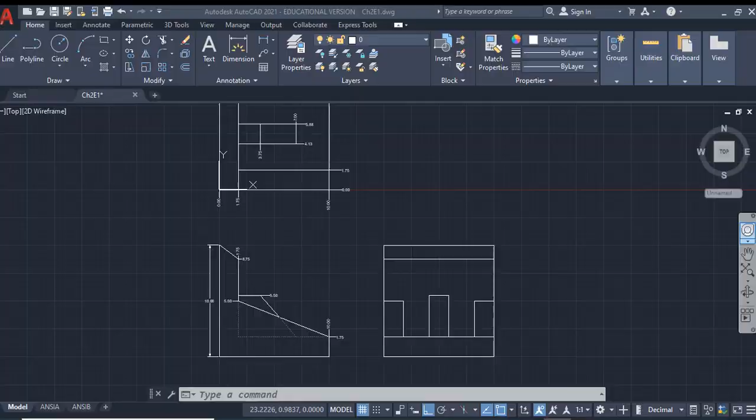For this last exercise, I'm going to pull up that Chapter 2 worksheet that we did in 2 dimensions before, and you can use any Chapter 2 worksheet you want. This has my title block set up and also the 3 views in 2D.

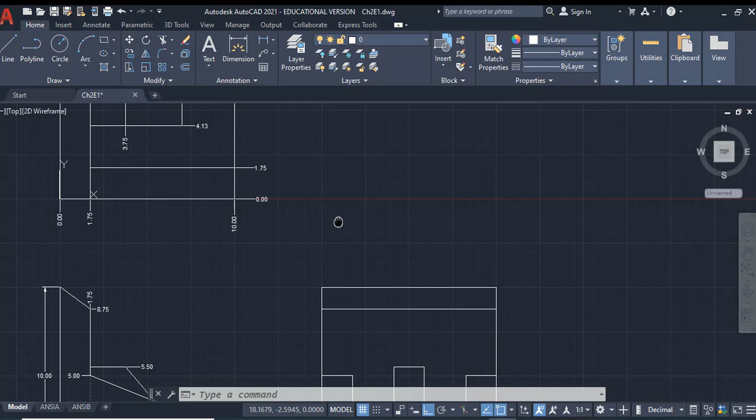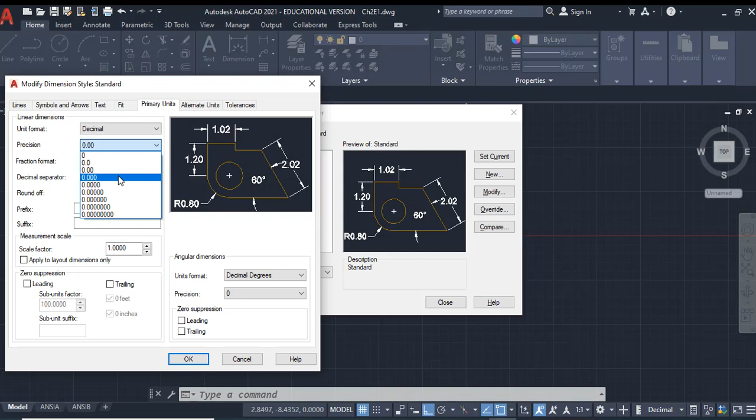I went ahead and added some coordinates over here. I moved my coordinate system over to line up with each of these blocks. If you type in dim style, this will allow you to modify the number of significant figures you're showing. It defaults to 2 significant figures, and you can also bump the text size up if you want, and here's the arrow size. I'll go ahead and set that current, and I'm going to say there's dim linear, dim angular, and I'm going to say dim ordinate.

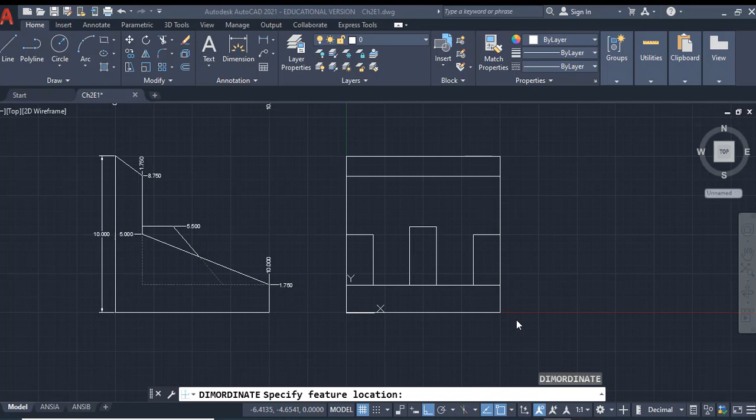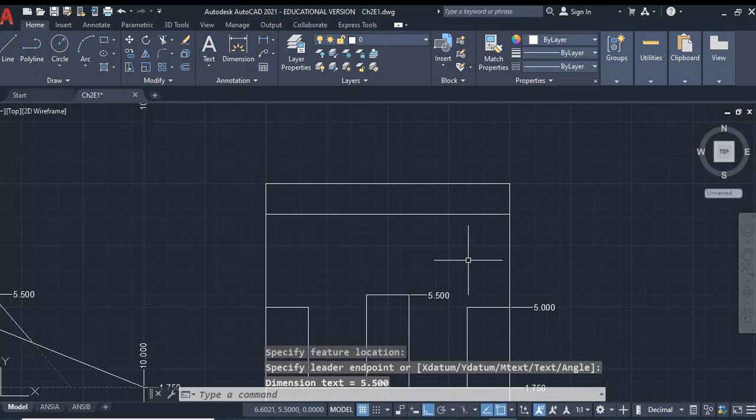With my snap settings on, I'm going to go ahead and grab some of these features. This is where you'll find out if you had everything dimensioned right, so you might be redrawing a few things if these did not get in here. Just remind yourself of the dimensions of whatever worksheet you did out of the book.

Looking at these, I think probably this top view is going to be the easiest view for me to get through. So I'm going to go ahead and open up a new drawing, making sure to grab my title block that I created before, because I'm going to use ViewBASE and pull some things into our title block here.

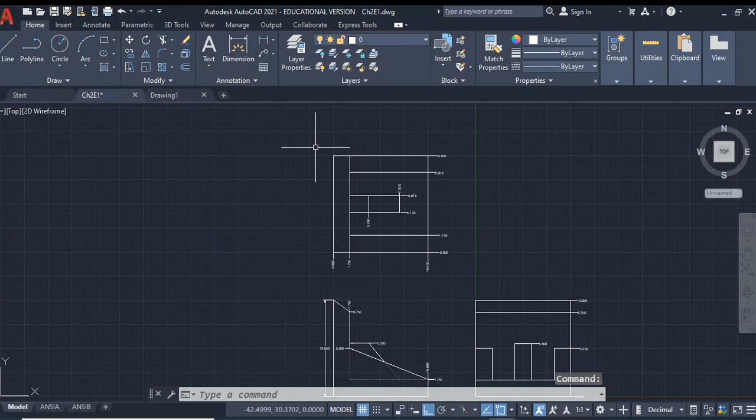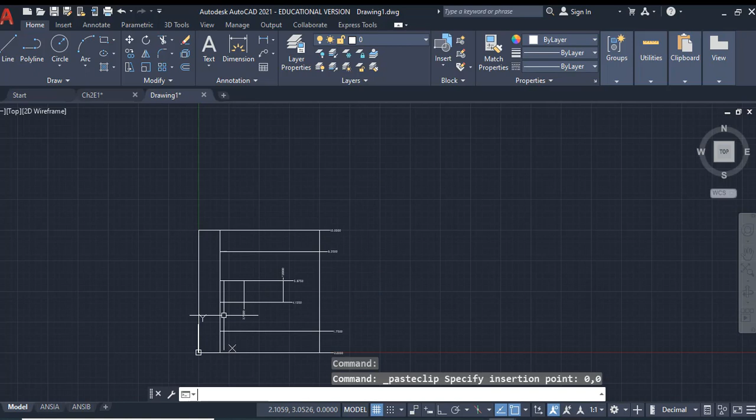I'm going to start with this top view. So I'm selecting the whole thing, right click, and copy this with a base point onto my clipboard, then pull it into drawing number 1 with just a Control V. Here I've got my base point, and I'm going to put this in 0,0. That just gives me a starting point there.

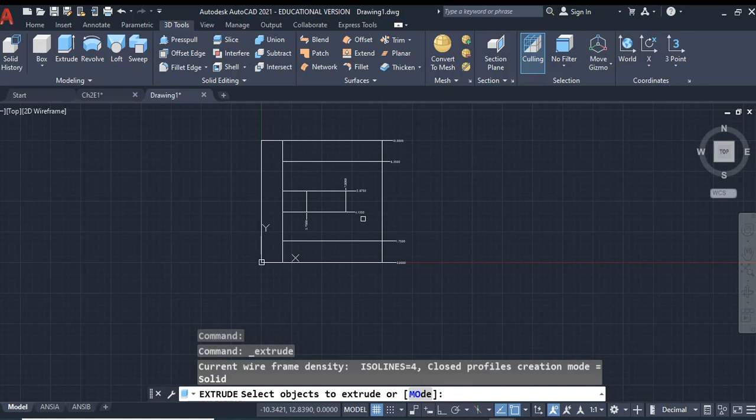For the outer rectangle, I'll go ahead and start there, just a 10 by 10 rectangle. I'm going to go ahead and extrude that first, and I will actually extrude it down. If you remember the dimensions, it was 1.75 high, so I'm going to send that down negative 1.75, and that'll be just the floor of my object there.

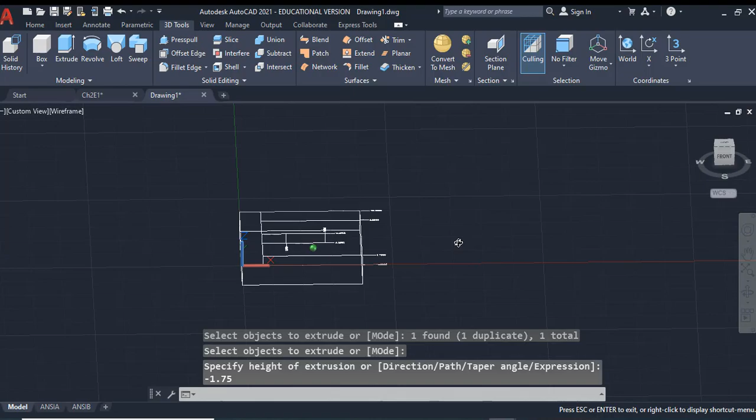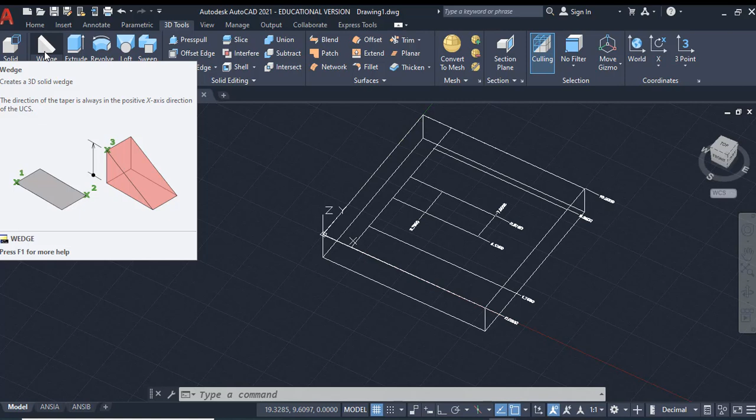Coming back over here to remind myself of dimensions, I have kind of a wedge at the edge that goes up 3.25. If you remember how to draw these wedges, I'm going to click 1, 2, and that first area I click is the side that the wedge is going to pull up on. So I'm clicking on the side I want to be high, then on 2, and I want it to go up 3.25. There's quite a few different ways I could do that, but using that wedge command is a great way.

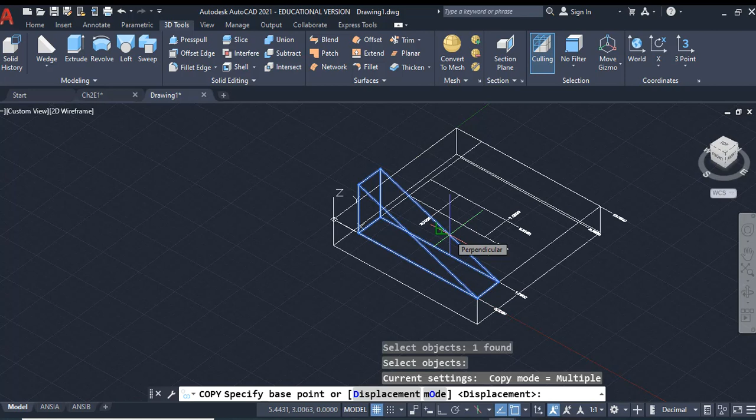Next, I'm going to copy this. So select, and I'm grabbing a base point that's going to allow me to snap it in place on the other side, so really think about the best place to grab that base point. So there's our two wedges, and going back and forth to check some dimensions.

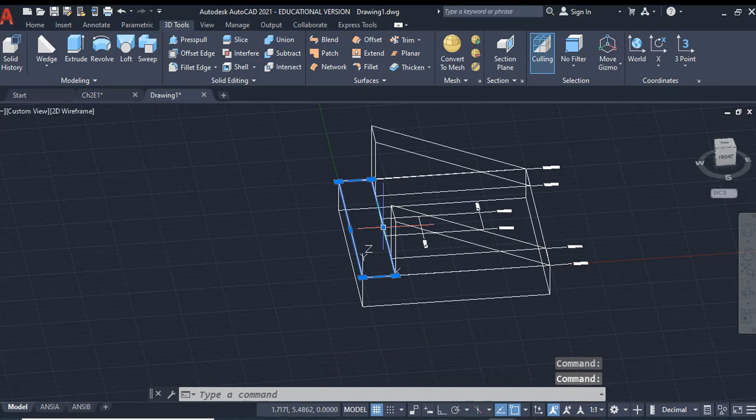We'll have another rectangle that goes up to 8.75, or if we want to remember, see how that works, this will be a height of 7 if we make an extrusion here. So I'll go ahead and grab this rectangle and extrude it up to a height of 7.

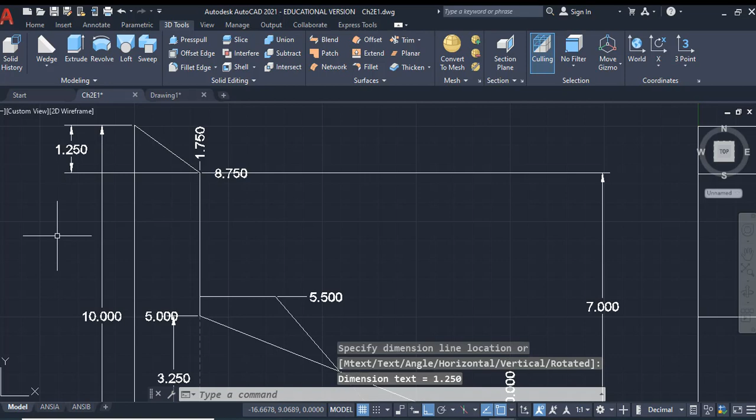And let's see, this is another wedge on the top. So this top wedge goes, let's just be linear again, going from 8.75 up to 10, or a height of 1.25. So come on over here. For this one, it would be quite difficult to create without the wedge. So I'm going to click on the side I want to be high, click on the low side, 1.25. There's one wedge.

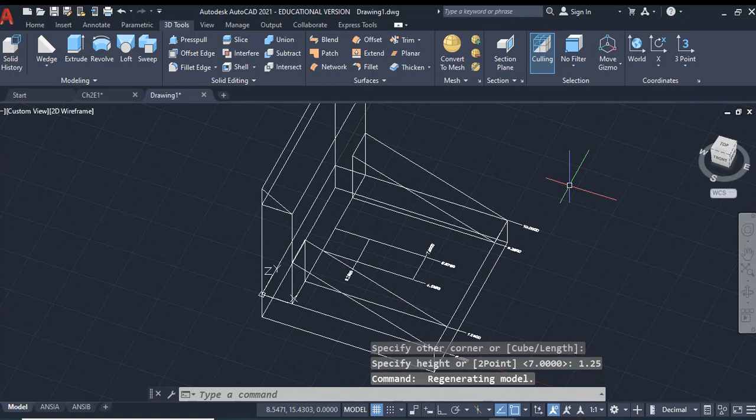So I've got this rectangle on the floor. Now this is not a closed surface, so I'm going to go ahead and make another rectangle here on top so that I'm sure to have a closed surface. And we'll go ahead and pull that up to this 5.5 mark.

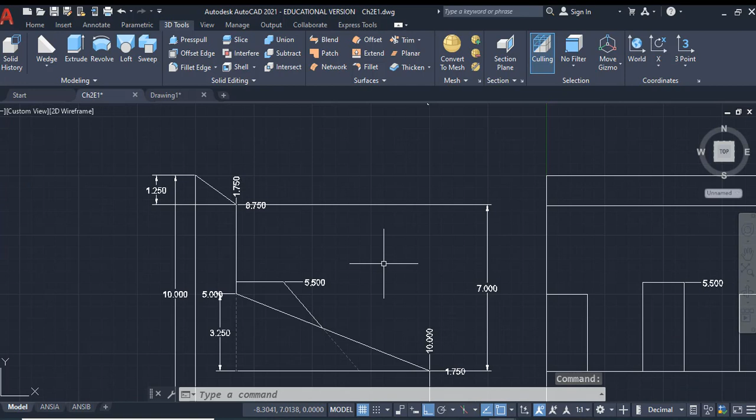So again, I want to see this dimension from the floor. That's going to be 3.75. Okay, so we'll say extrude this guy, enter 3.75.

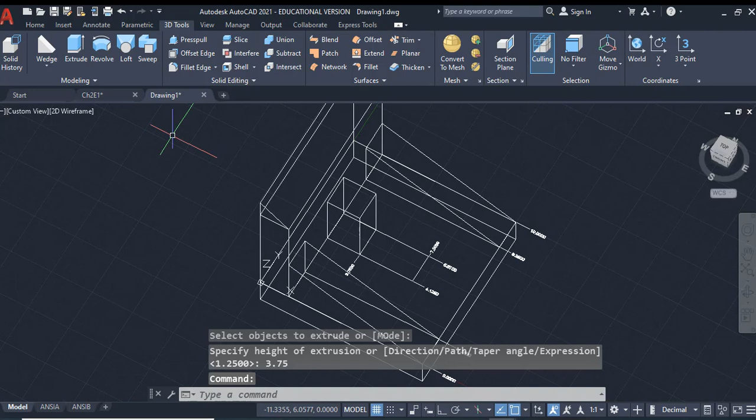And in front is one more wedge. So this is really good practice at making wedges over here. So again, snap, snap, and up.

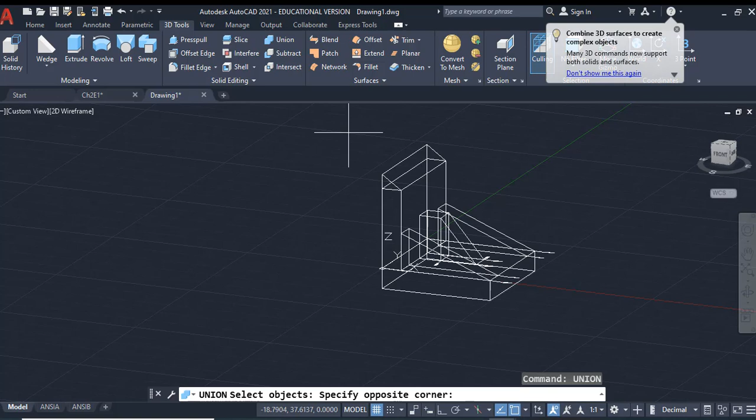Okay, one last thing. These are all separate pieces on here, so I'm going to go ahead and use that union command to get this all into one piece. And at the very end, I'm actually going to just get rid of that drawing now that I have my three-dimensional object. So come back over here to my realistic view, and it looks like we have our shape.

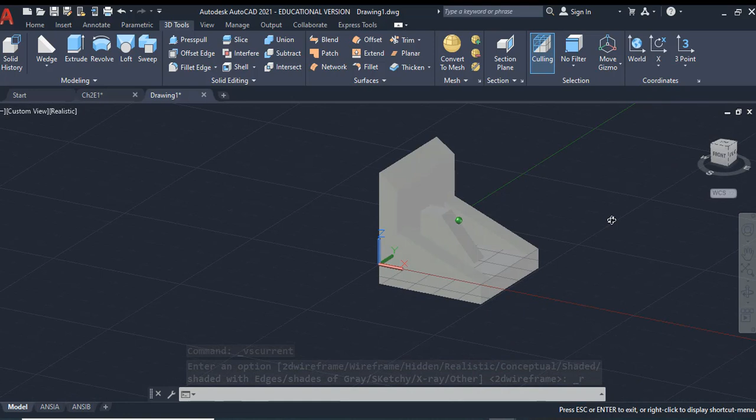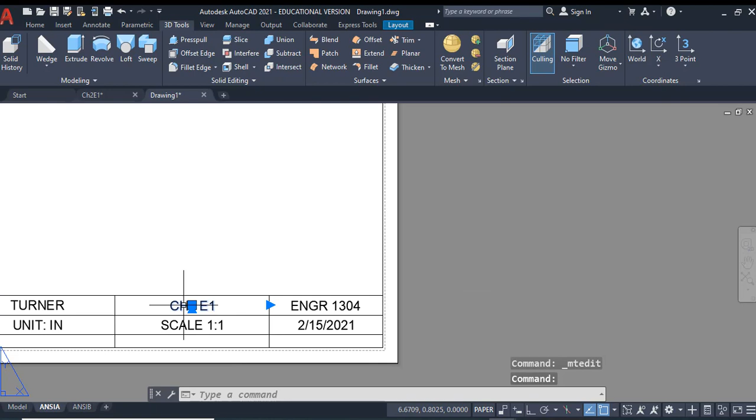Okay, so one more step for these Chapter 2 worksheets, and that is to come over to one of these title blocks that you have, and you can go ahead and update the information. So put in the current date, and you can update the chapter on here. So this is Chapter 2, I think it was Exercise 1. And we will mess around with the scale after we see what scale it is.

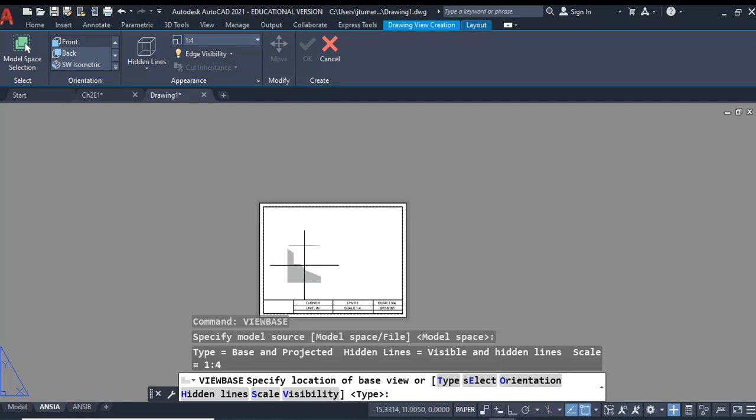So the grand finale command is called ViewBASE. And we're going to grab something out of our model space. You might have to wait a little bit the first time you pull this command up because it's looking around in its model space, and you see it's grabbed here, the side view.

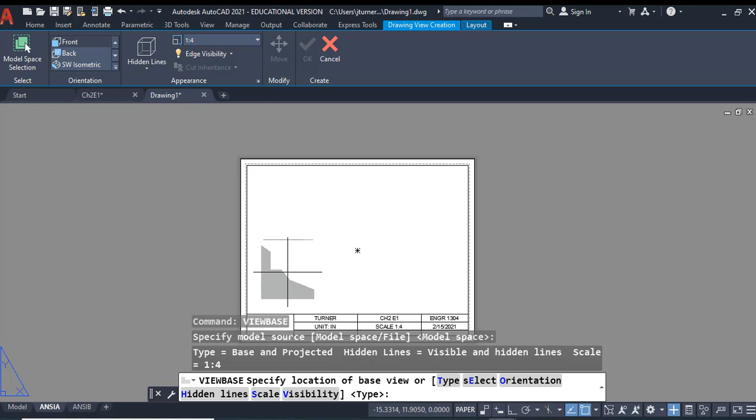Now before I left click on this, I can change the orientation, I can change the size of it. I can do that now, or I can do that later. So I'll show you how to edit that later too. So I'm going to go ahead and move this into kind of a nice spot and left click it down, then click enter, and I'm going to left click, left click, left click, right click, enter.

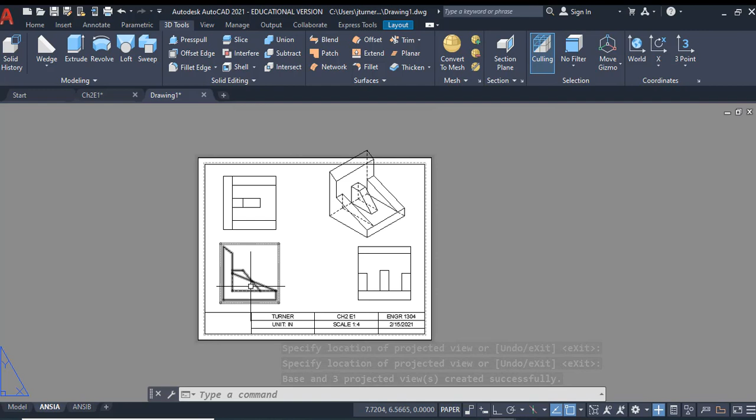Okay, so we got this in fairly good shape. If you click on it, it's all kind of connected to this lower left-hand view, and you actually can click on this blue box and drag it around, reposition it if you would like. For anything that has the wrong scale, you can right-click on it.

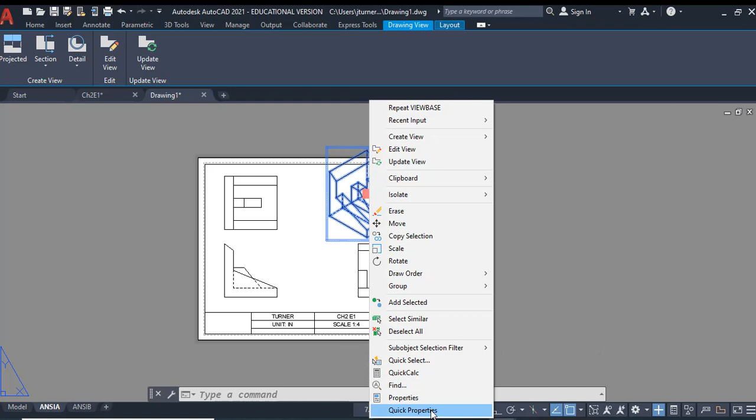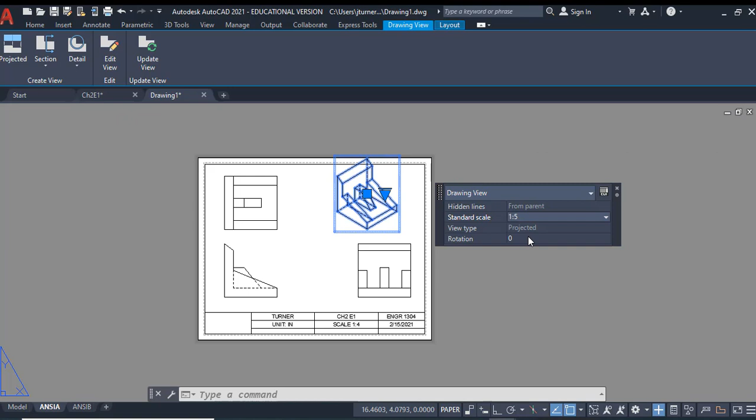There's properties and quick properties. Quick properties will allow you to change the scale. So for this case, rather than setting the scale for what this one is, we can change this around to be really teeny here, or I think it put it down to 1 to 4. So we'll try 1 to 5 instead. And that will just give us a little bit more room up here so that we're not off the printing page, and you want to give yourself lots of room for dimensions.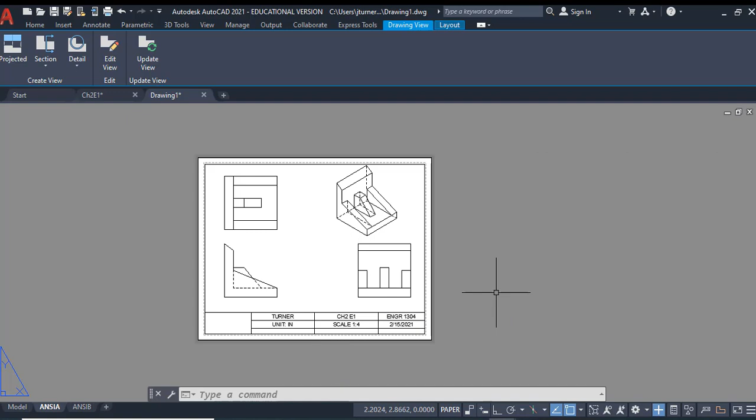For all of these, you can right click and pick up that properties. You see here the standard scale is 1 to 4. So that is something that we can update our title block with, make sure it's showing the right scale. And that is the end of it.

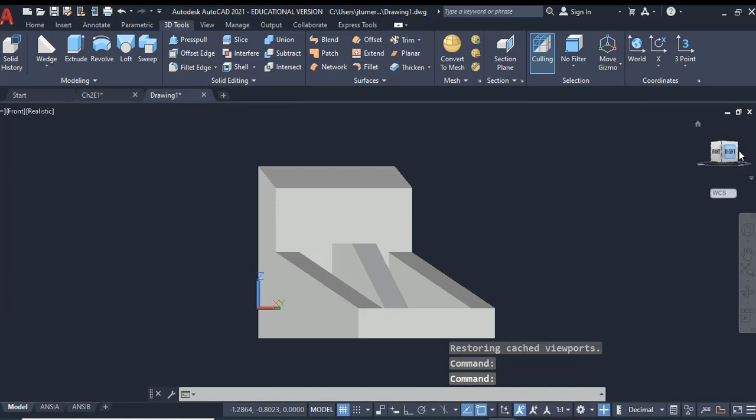So come over here to Model Space, create your three-dimensional model, and this front side, right side, and the top side, that will correspond when you're using ViewBASE to what is going to be put on the front. You can rotate this around if needed, or you can change that orientation as you're putting it on here. So play around with some 3D rotate, 3D move if you need to, but see if you can get one of those Chapter 2 worksheets as a three-dimensional object and pulled over onto your title block using the ViewBASE command.